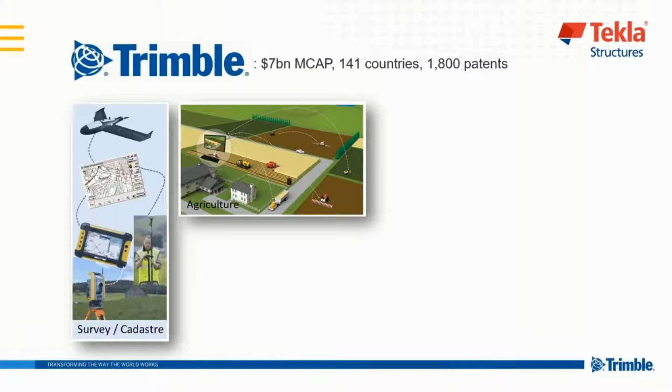To start with, a brief introduction of the company. Tekla Structure is owned by Trimble. Trimble is a $7 billion market cap company with presence in 141 countries with more than 1,800 patent products. We are mainly into surveying equipments, hand-holding equipments, then in agriculture sector. We are also into the transportation and logistics and heavy civil. We are also into the buildings, and Tekla Structure as a package, it's included into the buildings.

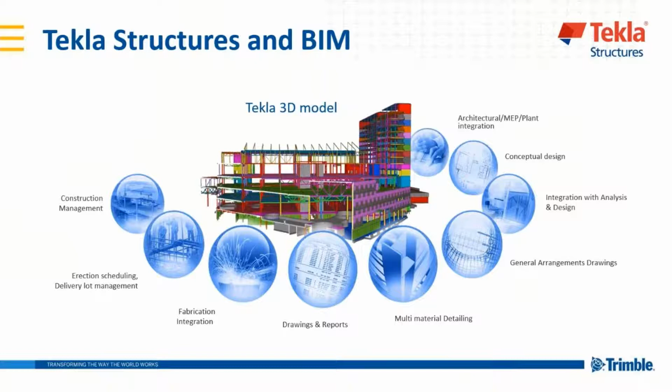Tekla Structures is a model-based software wherein we can import architectural, MEP drawings, conceptual design, then we can create general arrangement drawings, shop drawings, fabrication drawings, drawings and reports for various quantities takeoff can also be done, and construction management tools are available for the same.

Tekla Structures supports 34 major country standards and codes. All the codes such as BS code, Euro code, US code and IS codes are all supported in Tekla Structures.

It's a model-based software, so the change management is very good. For any changes in the model, the reinforcements and drawings are automatically updated, schedules and reports are generated. If there are any changes in surfacing or embeds, the changes are also automatically done.

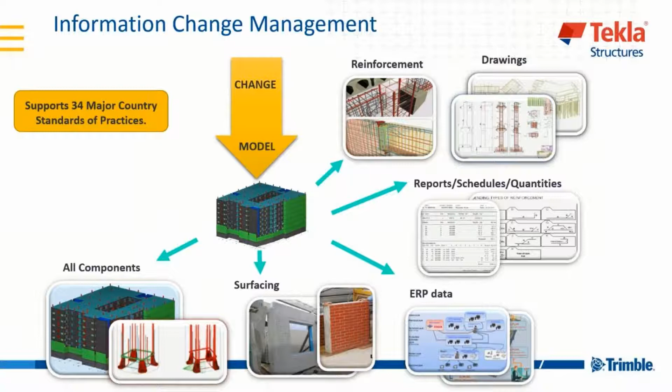It's easy to model and handle complex structures. It is easy for simple structures such as beams, foundations and columns, as well as complicated structures such as bridges, chimneys, silos. We will see this in the next slides. These are some snapshots of typical structures.

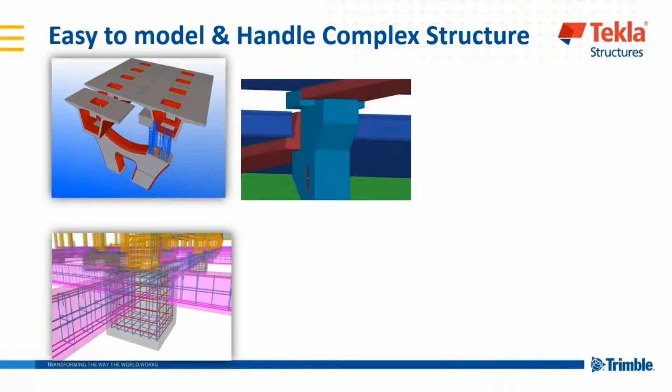Here's something with variable thickness or variable levels, which can be easily modeled in Tekla Structures. This is an octagonal foundation with reinforcement, for which we have some macros.

We can also incorporate MEP drawings and MEP models to check for clashes. If there are any clashes, we can take care of them in the modeling itself so there are no problems at the actual site construction. We can also take up the quantity of formwork from the model.

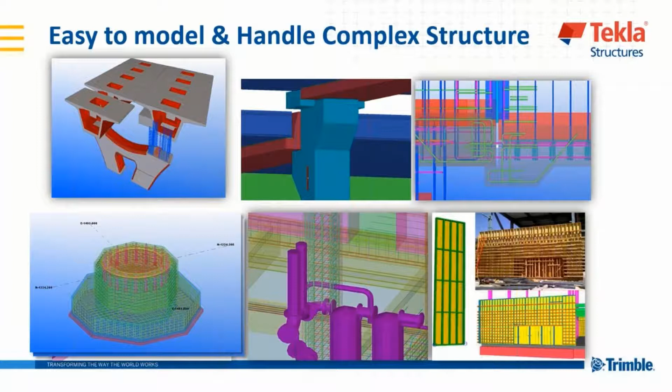Moving on, we have easy modification of object geometry. We have an option called direct modification or direct manipulation, wherein we can just drag to change the geometry of the objects or rebar. It modifies the geometry by dragging handles, edges or surfaces.

This works for concrete beams, columns, panels, slabs and footings, and also for all the steel elements. It can be used to modify cuts or openings present in the structures.

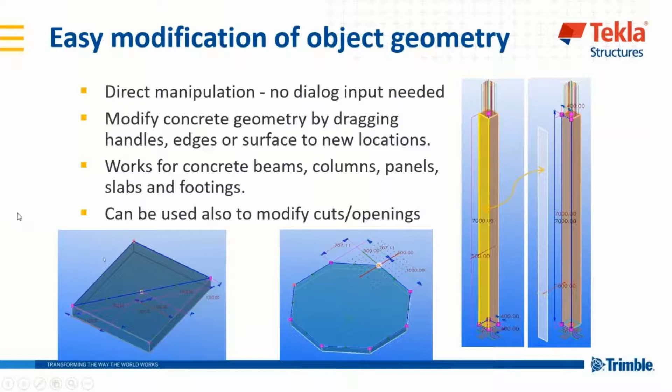Just a small example of how complex geometry can be handled. Here is an example wherein a bridge deck is taken, and a second example which we will be taking is an Intze tank, or an elevated water storage reservoir. We have taken a cross section of it.

We will see how with the help of this AutoCAD file we can create a 3D model. To start with, I've taken a bridge deck profile. Here we have many options to create or define our own profile, such as sketch editor, polygon, plate or DWG file. The sketch editor is basically for parametric profiles, and the rest are for fixed profiles.

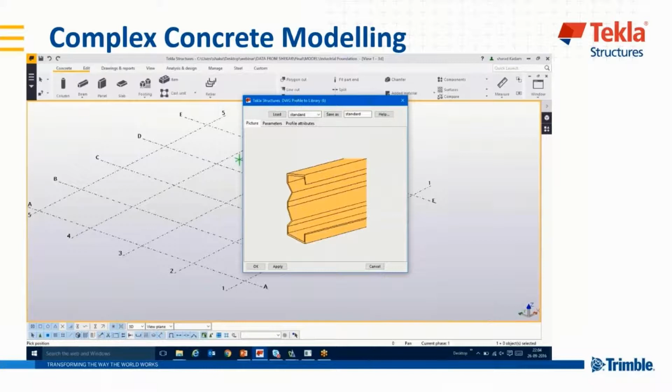So here we are using a DWG file. Here we can specify the name we want to give it. In this case, we have taken the name as bridge, but we can define any name as per our requirement. We select the file, and with just two clicks, the profile is created.

The profile that is created is a native Tekla profile. We can add reinforcement, cut it, or do anything to it the same way we would with a native Tekla profile. These profiles can be taken across the model or shared and taken into a new model as well.

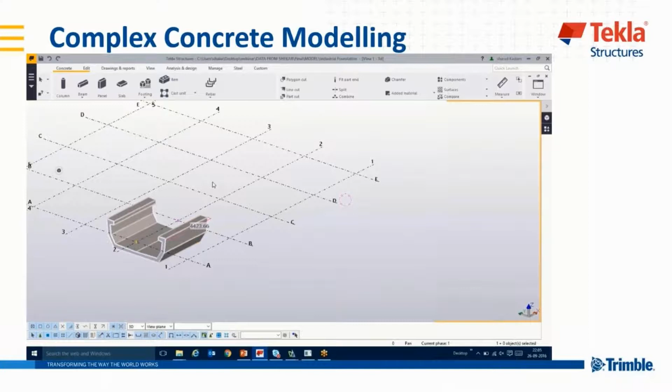Similarly, we will see one more profile, basically a tank profile. Now we will see how it's already created and how we can use it to create a tank profile. This is a cross section we created in a circular manner, and the second half of it. In this way, a circular tank, or an Intze tank, or a water storage structure is created.

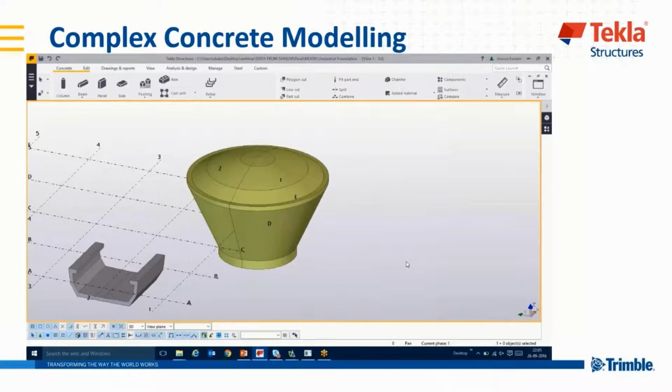We can split it into various pours as per our requirement or as per construction requirements. Just adding some clip planes to it so we can see it clearly.

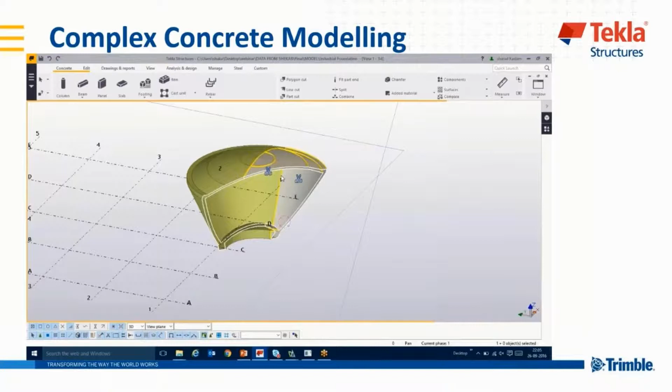It's very easy to create these kinds of profiles, and what we've shown here is not only applicable for a water tank or a bridge profile. This also applies for silos, bunkers, chimneys, or any complicated structure where a profile is required.

Moving on to reinforcement modeling, we have three different approaches. The first approach we prefer is using macros. We have a big library which caters to all requirements, with basic foundations, pad footing, column, beam, slabs, or any other structures. For starter bars, we can use these default macros that are available.

We can create our own custom components if something is missing from the library. Here are a few more components such as piles, octagonal foundation, radial bars, and raft foundations. These are already there with the default installations.

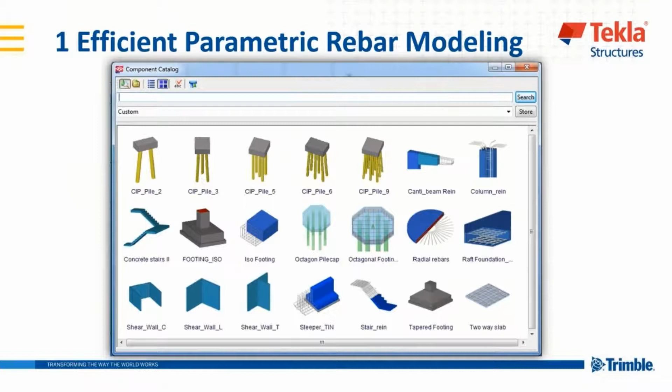Then some more - these are again different kinds of piles, circular foundations or octagonal foundations again, or a pile cap. These are there.

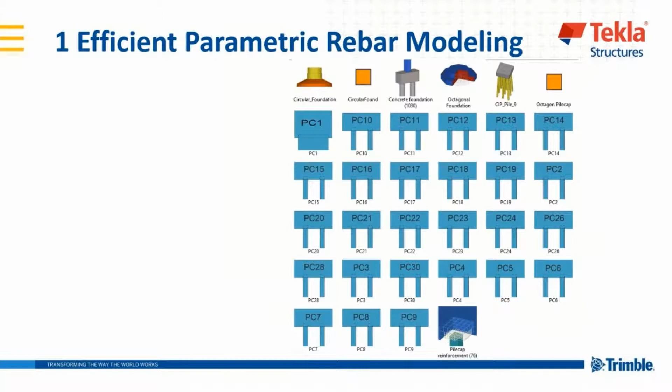The second method for adding rebar is with the rebar shape catalog. This is a dynamic way of modeling reinforcing bars wherein lengths are calculated automatically based on the geometry of the object. We don't have to pick the shape or range of the bar - it is automatically taken care of by the shape catalog. Whatever frequently used bars are there, we can club them together and adjust rebar properties or group properties, spacing, bar diameter, etc.

Herein we can customize this shape catalog. The frequently used shapes such as L bar, straight bar, or U bar can be clubbed together and made as favorites.

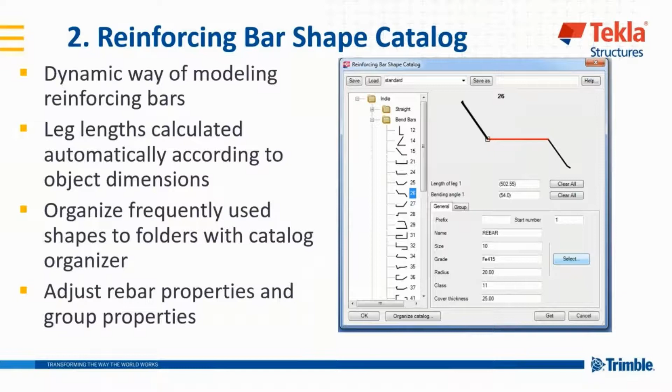The third option for rebar is manual modeling, wherein we can model single rebars as per our requirement. We have various options such as normal rebar, which is just picking the shape and the range. Second option is tapered, wherein the shape varies as per the length of the member, used for tapering members. Third option is tapered ridge or tapered curve, which are self-explanatory. We also have spirals, generally used for circular columns.

We have options for manual and automatic splicing. We can manually splice at whatever locations we want, or use automatic splicing, which generally uses the maximum stock length. We can define this maximum stock length in the program; by default it is 12 meters. It's basically a notepad file, so we can customize it as per our requirement. So if a bar is modeled for say 100 meters, since it's practically not possible to take a 100 meter bar, we can splice it at the 12 meter length or whatever default stock length we have. This stock length can be changed as per our requirement, grade, or company standards. It's a very easy to use tool.

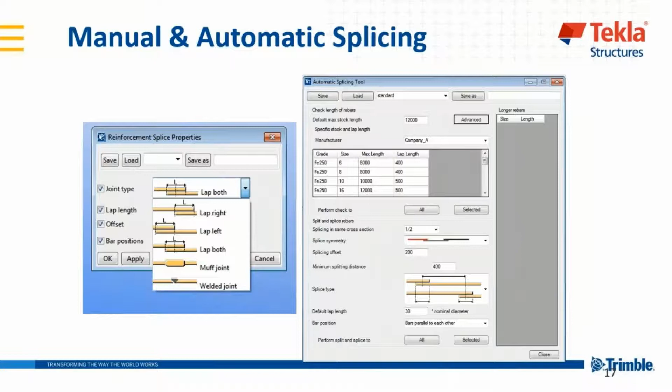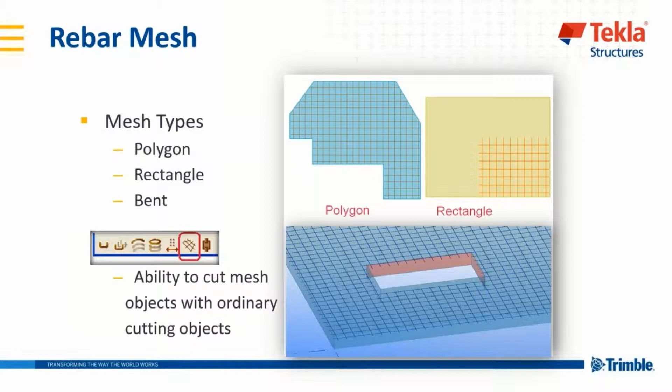We have options for cutting the meshes as per openings, such as shown in this image, wherein if there is an opening we can cut it. There's also an option to ignore the cuts. Suppose some cuts are smaller in length, say 100mm by 100mm, and we want the bars to pass through instead of being cut, that option is also available.

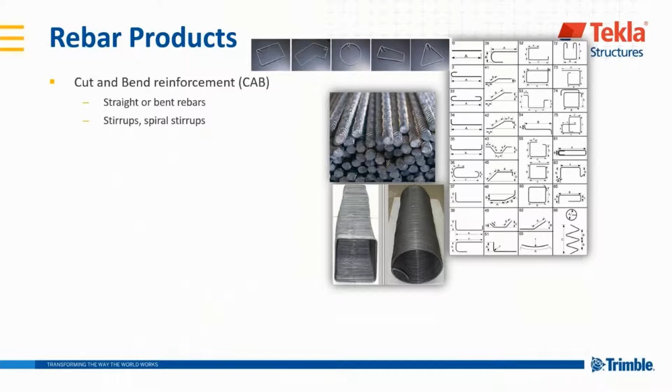Continuing with the rebar products, we have cut and bend reinforcement, which are straight or bent bars. Then we have stirrups or spiral stirrups - normal stirrups and spiral stirrups, mainly used for circular columns. Then we have ties, hoops, and other shapes.

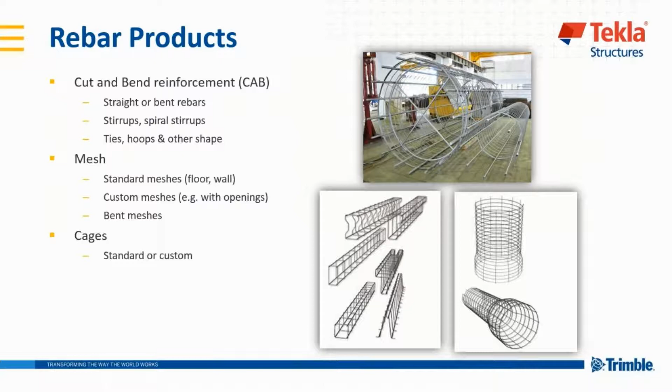We also have meshes, which may be standard or non-standard, custom meshes with or without opening, or bent meshes mainly for trenches or slabs. We can also have cages, maybe standard or non-standard, as per requirement.

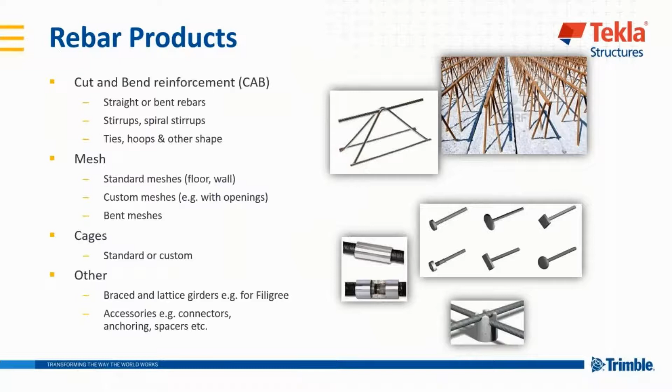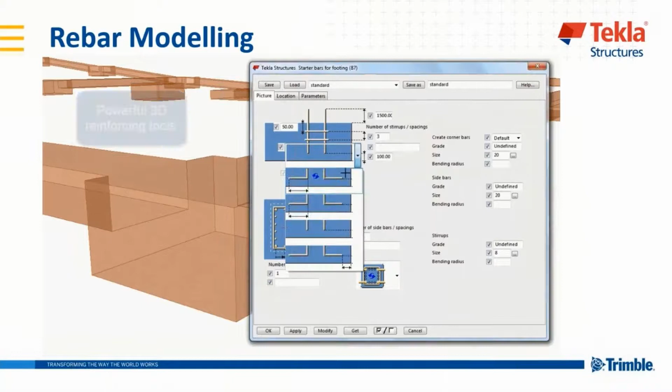Moving on to rebar modeling. Rebar modeling is very easy - for example, here we are adding starter bars to a footing. With just one click the starter bars are added and it is fully customizable. Now we are taking a pad footing macro.

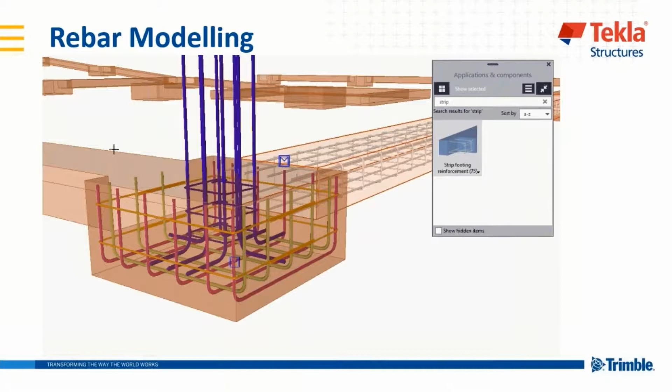We can modify as per our requirement and add the pad footing rebars to it. For strip footing or plinth beam, we can modify the main bars quantities, covers, spacings, etc. This maximizes your productivity.

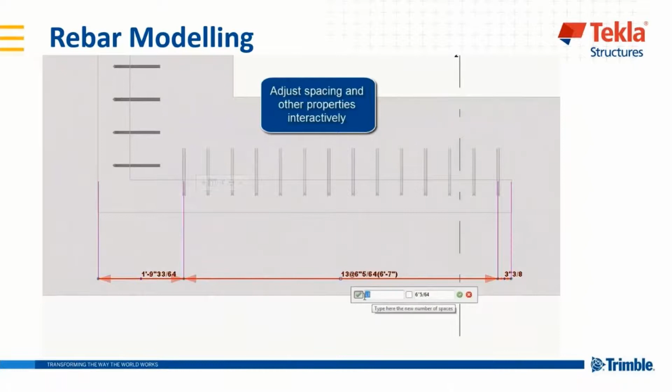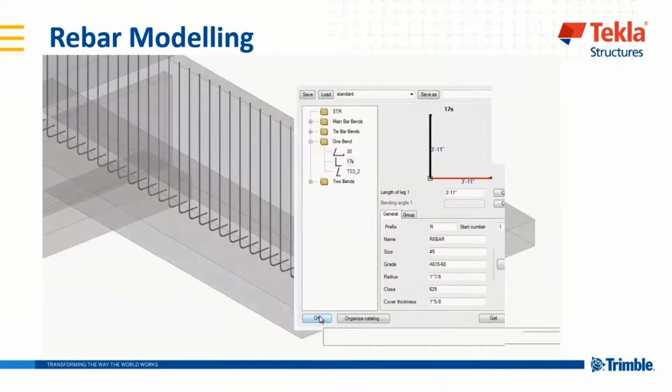The second option we've seen is the shape catalog, wherein we just pick the element and the rebars are added, taking the shape from the object. We can modify the cover, spacing, and how many bars we want - such as here we are putting an 8-inch spacing, so we can modify it as per our requirement. We can shift the bars as needed. Say we want to add an L-shaped bar, so that can be done in whatever direction we want.

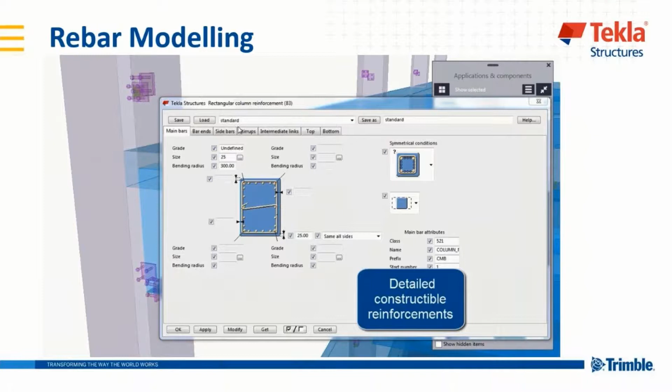Similarly, moving on ahead, this is for a column. We can select the column macro, with or without laps and side bars, define the quantity required, bar dimensions, and everything.

So this reinforcement is added with a lap at the tops. We can also add side bars for slabs, which is basically edge bars. We can select it and with just one click the side bars are added.

Again, longitudinal bars for rebar, for beam. If we want to give some longitudinal rebars to the beam, we can do that. We can provide the hooks at the end as per our requirement, and the length can be changed. It's fully customizable. We can also use the stirrup macro, which has 7 different zones for adding.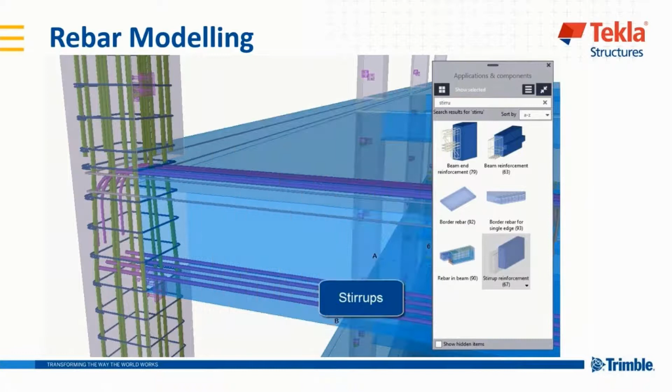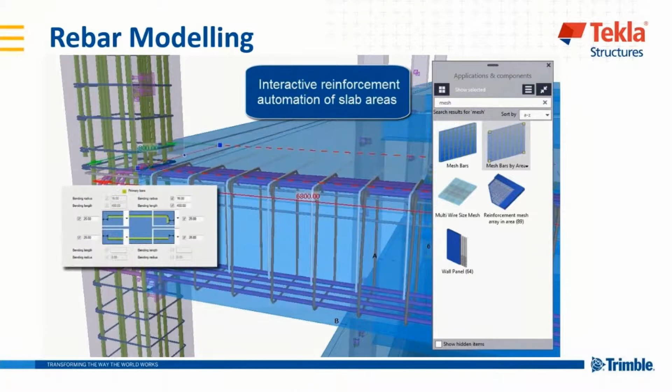Mainly we are using 3 to 5 different zones. We also have options for using 7 different zones. Then we have the mesh reinforcement macro, wherein we can select the macro and with just one click, we can also provide edge bends at the ends as and when required. So with one click the reinforcement is added.

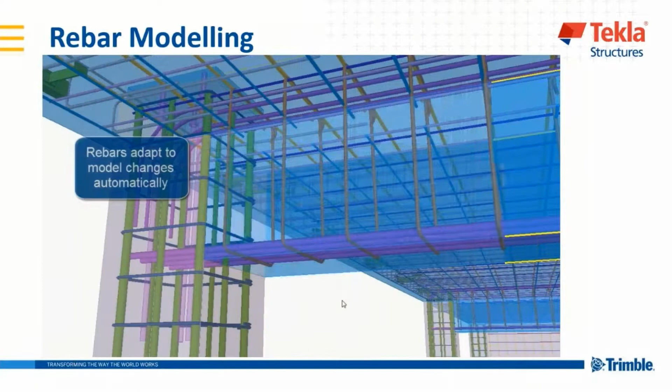So it's very simple, easy to add reinforcement, and this is completely adaptive. Meaning if we are changing the beam sizes or slab sizes, it can be changed. If there are some embeds which are added and it is conflicting with the rebar, we can ensure that it fits. So herein we can see that if it fits in the model, it will definitely fit at site.

We can also get the quantity of rebar that is used. Say for example, here we are getting 6 mm, 8 mm, 10 mm. How much quantity of rebar is used, we can get with just one click. This is through the organizer.

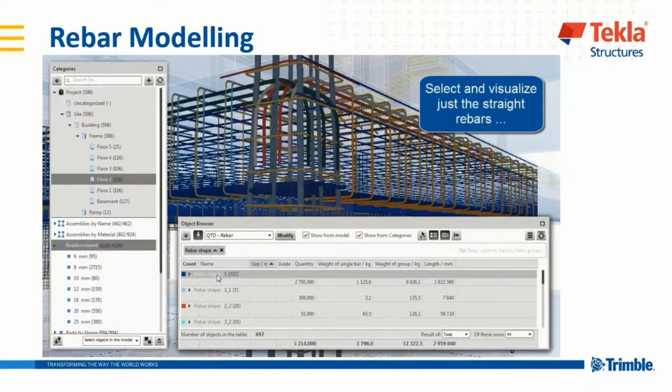Say for example, we want to know for the second floor how much rebar is used. So on the right hand side we can see the rebar quantity. We can group it as per our requirement based on shape, size, diameter, or whatever options we want. We can color it based on the groups. So herein we can see that all these are the straight bars that are selected.

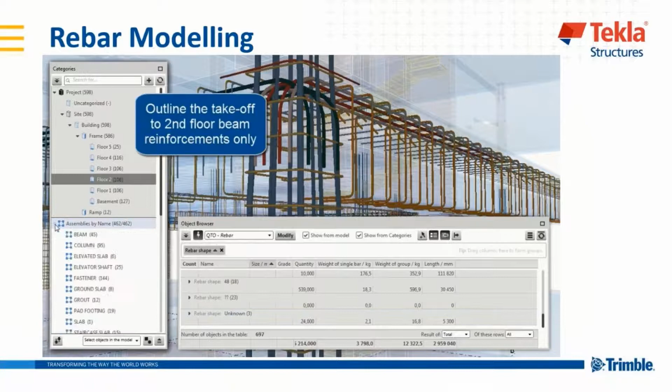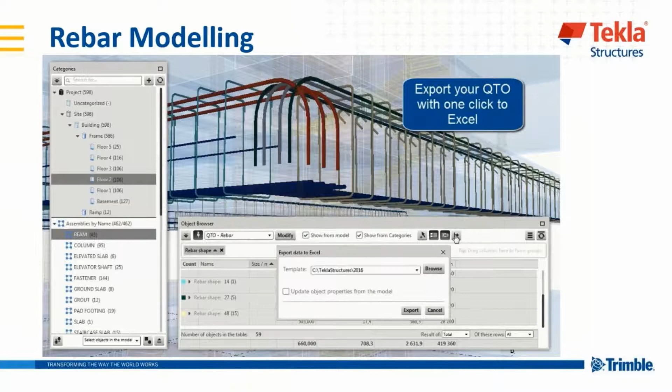And all these things can be exported to Excel as well. So herein we want, say, for second floor beams, we are giving different colors to it, and now we are exporting the quantity to Excel. So with just one click the rebars are exported in Excel format.

And this Excel format is also customizable, wherein you can group and ungroup the bars. So it's very easy to use, easy to handle, and the output that we are getting is very easy to obtain.

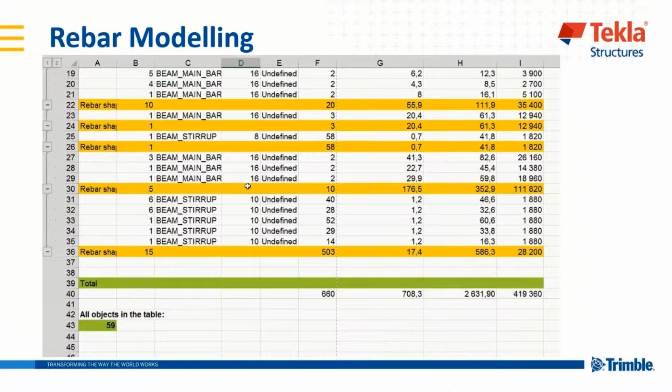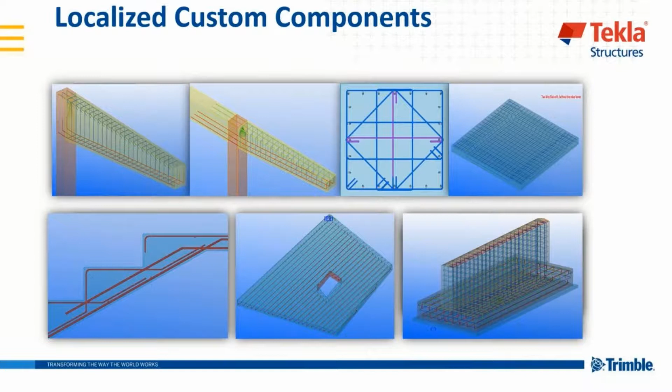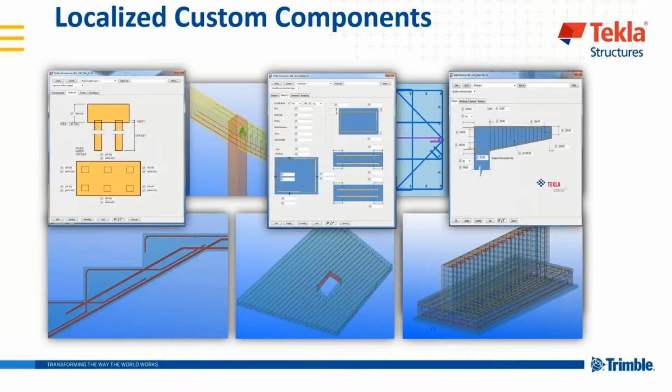So some more modeling tools that are more useful for these kind of industrial structures, such as creating a hollow section. This is useful in case of chimneys, wherein we can also provide the thickness at various stages. If it is tapering at the top, we can define it here itself. So with this kind of tools, it is very useful and handy to create complex geometry.

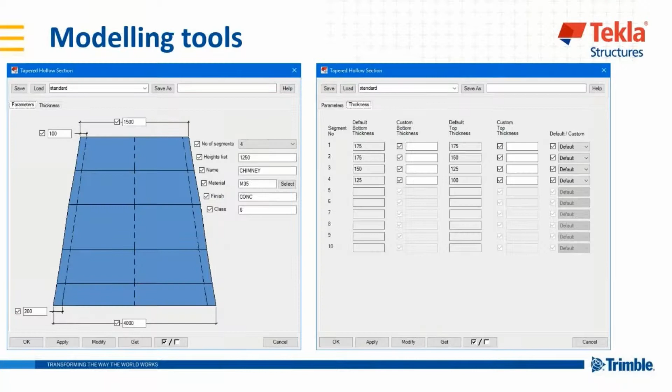So this was basically for tapered hollow sections. And we have a few more tools, mainly for rebar polar array. It is useful in circular tanks or any circular water retaining structures, wherein rebars need to be added as shown in the figure.

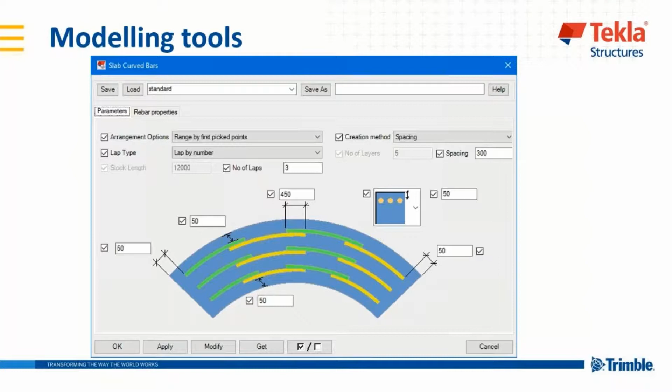Then we also have slab curved bars, which are useful for circular slabs. The rebars are added as in the image. Herein we can also add the stock length or how many laps we want. If we want a fixed amount of laps, we can provide it. If we want to use the stock length, we can provide that as well. There are many options available for this.

So moving on to the next, we also have the hoop bars. Hoop bars are mainly useful for chimneys or in the vertical members, or if there's a circular wall, we can use it in this.

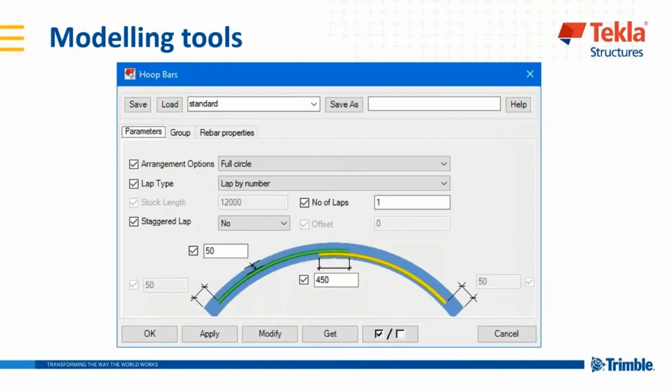Then we also have the circular panel reinforcement, wherein we can use it for vertical reinforcement. Again, we have the options for using stock length, or if we want to give the crank, we can provide the crank as well.

In industrial foundation or industrial structures, embeds play a major role. We have default embeds with Tekla Structures. Here are a few examples of the default embeds that we have. Again, these embeds can be customized as per the requirement.

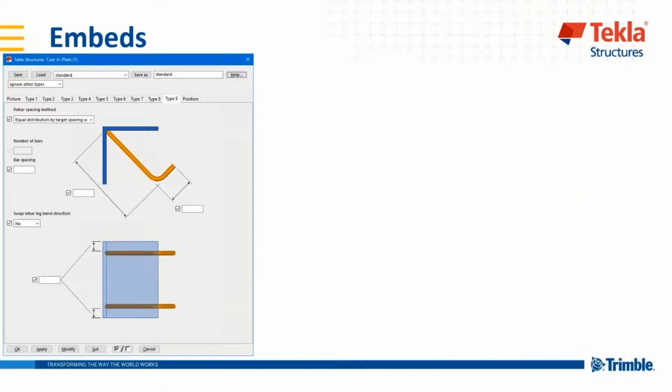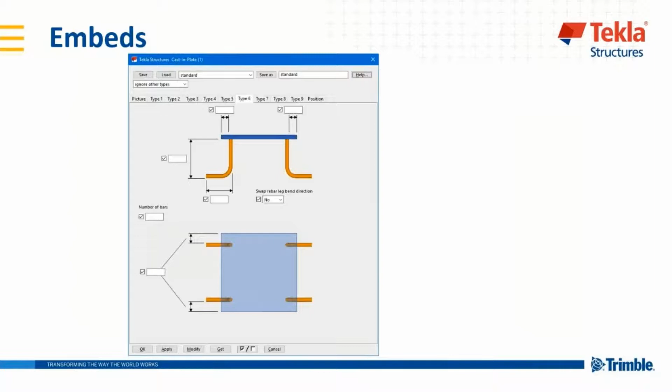We can change the thickness, length, width, or diameter of the bar. All these things are fully customizable. So here are some examples of the embeds available with the default installation. These embeds can be used for industrial foundations or any other industrial structures as well.

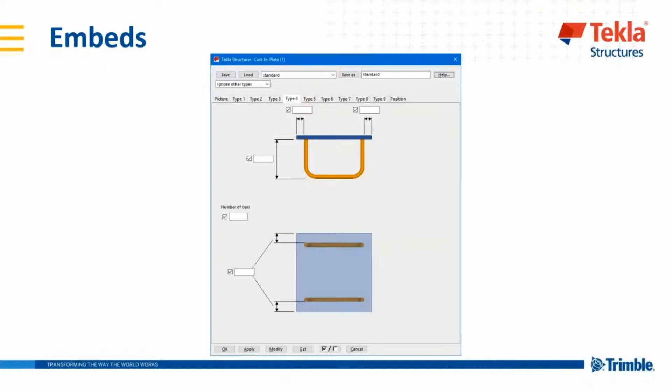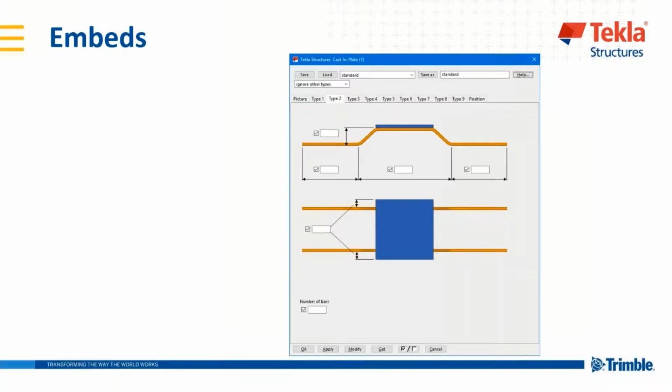We also have a big library in Tekla Warehouse, wherein we can download a few more embeds. So these are the embeds. Again, if you want more bars, we can add that. If you want to change the length of the bar, thickness of the plate, all these things are fully customizable.

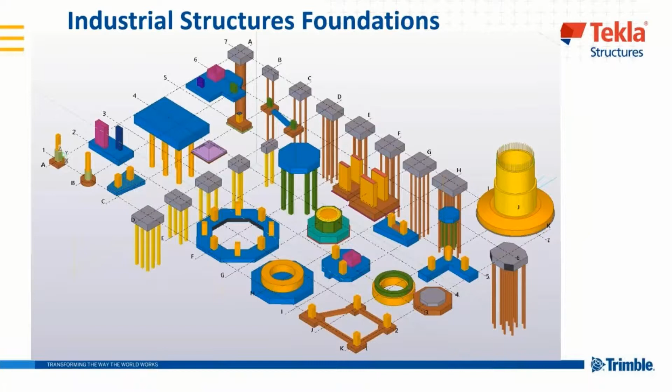Moving on next, this is for modeling of foundations for substructure. We have various kinds of pile structures available. All these pile locations can be moved or shifted as per the requirement. So just a brief snapshot of these industrial structures - we have a circular foundation, octagonal foundations. We will see this in detail in the next slide.

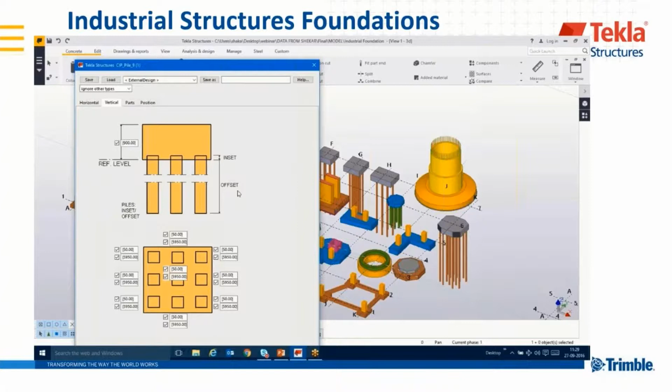Here we can see these are the pile foundations. We can change the dimensions of the piles. We can change the dimensions of the footings, both vertically and horizontally. If we want to change the vertical offset, all these things can be changed. Foundation depth can be varied as per the standards or as per the project requirements.

We also have the options for changing all these dimensions.

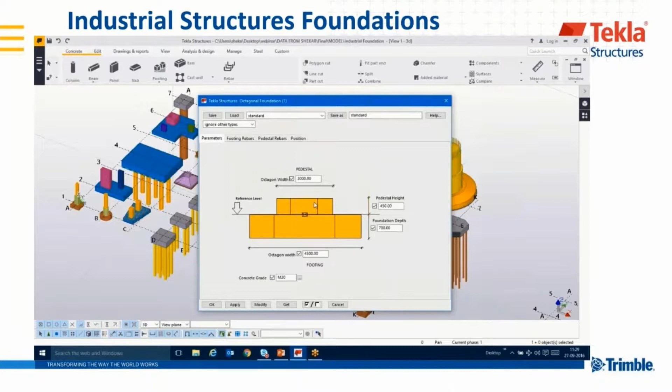Here we have an octagonal footing, octagonal foundation. We can change the pedestal heights, foundation depth, octagon foundation width, pedestal width. All these things are fully customizable. It includes the rebar as well.

So we don't have to first model the concrete and then the rebar - it's there by default. We can change the dimensions, bar diameter, spacing, and everything.

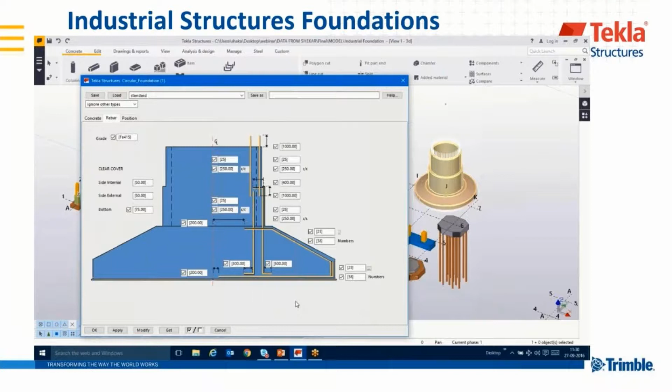We also have circular foundations. It is fully customizable - we can change all these parameters that we can see here. We also have the rebar built in, and changes in spacing and diameter can be done easily.

So this is just a brief introduction of various kinds of foundations available with the default Tekla Structures installation. We also have the normal isolated tapered footing, isolated footing, normal isolated tapered as well.

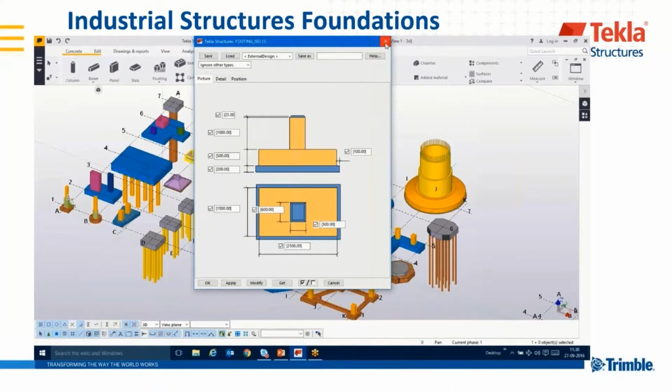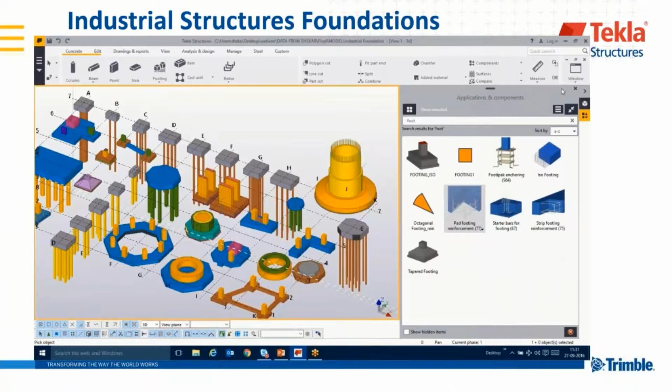We have various options for using normal footings. Here we can see a normal footing, pad footing, wherein we have options for changing primary bar and secondary bar. We have options for giving these bars in three different zones. Lacer bars are also available, as well as starter bars for footing or for column.

Then we have isolated footing. There are various types of pile footings available, so it can be used as per the project requirement or company requirement.

We have the pile reinforcement tool, macro number 76, wherein we can specify primary top bars, primary bottom bars, secondary top bars, secondary bottom bars. We can also specify lacer bars. If we want more bars at the pile location, this tool has the options for providing that as well.

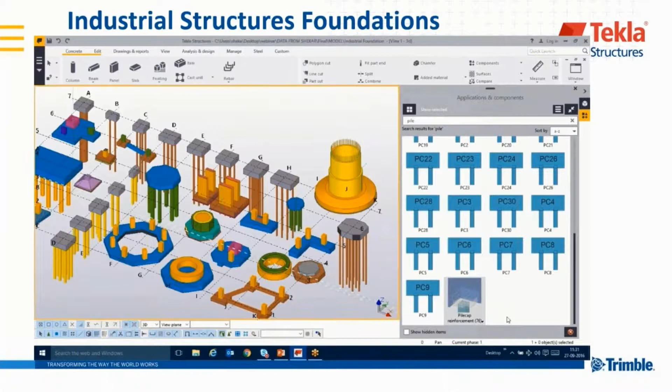So all in all, the industrial structure foundations can be taken care of with Tekla Structures. This is the octagonal footing. With this we can create nearly all types of footings used for industrial projects.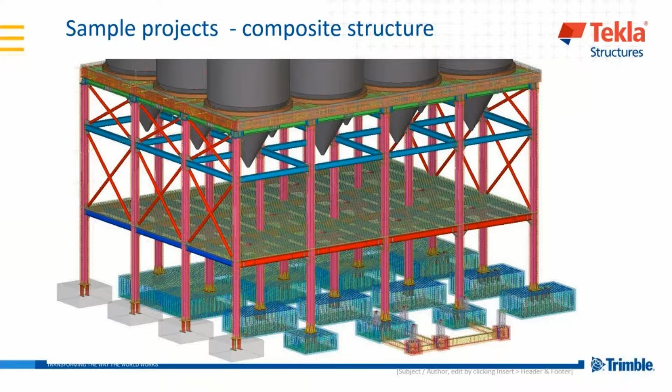Moving on next, here are some sample projects done in Tekla Structures. This is mainly a complex composite structure done by one of our clients. Here we can see that all the foundations and reinforcement have been done in Tekla Structures. Even the top portion has been done in Tekla Structures, and all this reinforcement has been modeled.

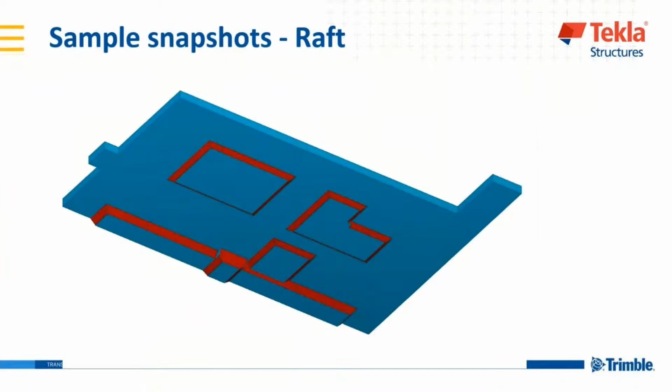Here are some examples of silos, and some snapshots for the raft foundations done in Tekla Structures with rebar.

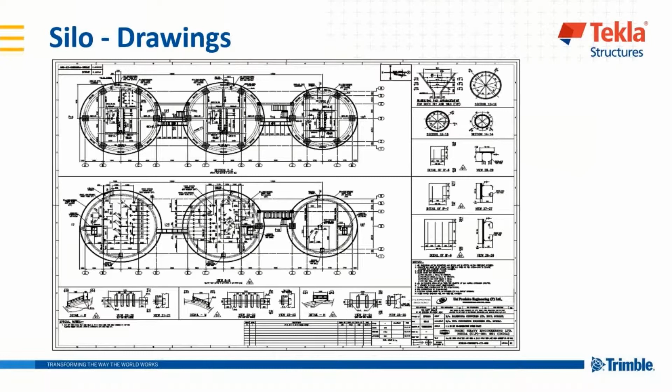Similarly, some more project snapshots. Here is the upper beam and how it is modeled in Tekla Structures. Some drawings for silos - these are the silos drawings created from Tekla Structures. A few more drawings.

Moving on next, we also get instant and up-to-date bar bending schedules. For any changes in the model, the bar bending schedule automatically gets updated - we don't have to create it again. It is instant and up-to-date.

Here are some samples of bar bending schedule which we can obtain on drawing, as well as in Excel format as per our requirement or the company's or project requirements. Here are some snapshots of the same. We also get the BBS as per SP34.

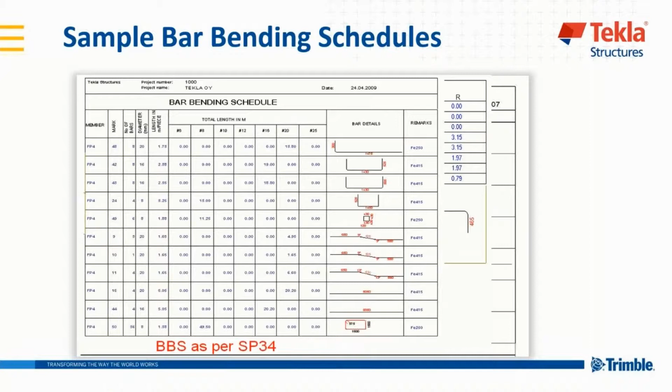We are also using shape code as per IS 2502. If some companies are using as per IS 2502, we have that option as well. A small video of the same: herein we can see that all these rebars are being modeled as per IS 2502. This is the rebar shape manager, where we can see all this rebar is as per the codes that have been defined.

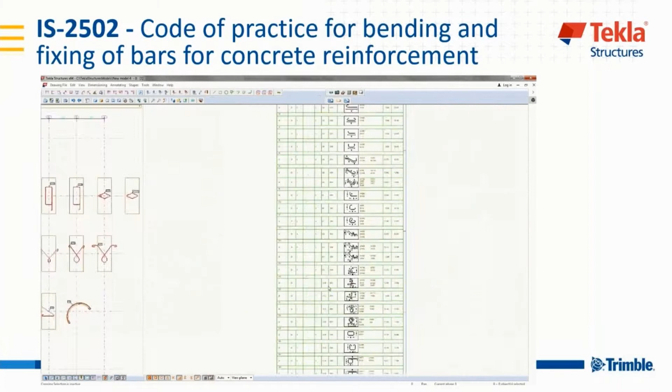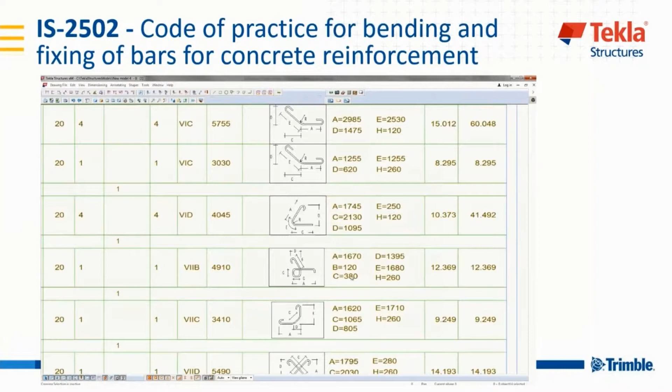So just a small drawing of it and the default output, how it will be obtained in the drawing. We will see this. Herein we can see all these shape codes are the default output, as per IS 2502. All these values A, B, C, D are as per the codes that we are getting. It's very easy to get, and all these templates are available with the default installation.

Moving on next, we have automatic clash detection. In industrial foundation or industrial projects, we use a lot of embeds, and we have a lot of MEP drawings or MEP elements coming up. So it's very essential to know where the clashes are coming up, so that it can be taken care of in the modeling aspects itself, so there should be less or no delay at the actual site. We have a clash check manager wherein we can check or identify clashes easily. This can be removed in the modeling stages itself, and it improves the site progress.

It reduces the delays that happen because of these clashes. It also saves material, and the decision can be taken at the modeling stage itself. So we'll move ahead. Herein we can run the clash check for the complete model, or if we want some part of it to be checked, we can do that as well.

So we can zoom to the objects. Herein we can see that by just clicking on it, we have zoomed to that object, and we can see here that these two objects are clashing with each other. So now we can remove this clash. The decision can be taken in the modeling stages itself.

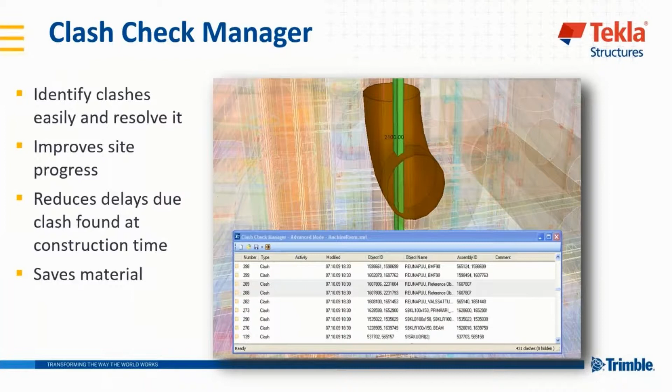Then we can assign it, or we can fix it. There might be some clashes which need to be ignored, and we can ignore these kinds of clashes. There are some clashes which can be taken care of at the site, so we can ignore these as well. Then we can also set the priority, whether it's a high priority clash that will affect the site, so that can also be done here. We can set the priority as low, medium, or high.

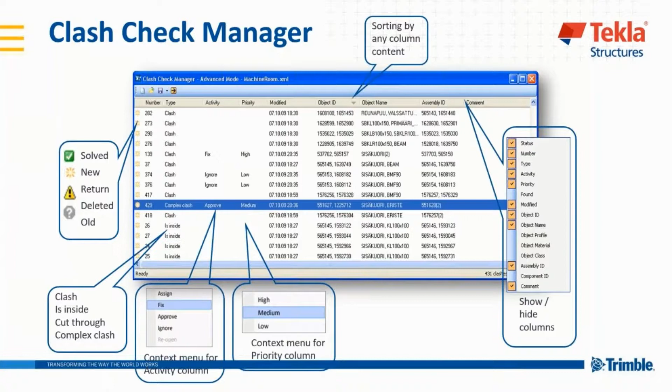This way we can easily remove all these clashes in the modeling aspect as well. We can sort as per our requirement, maybe by column, ID, or object, whatever sorting order we want. We can add various options such as profile, component ID, and assembly ID. All these options can be added or removed from this report, and this report can be exported as well for sharing purposes.

Moving on to the drawing, we have automated drawings wherein these drawings are created. There is no conflict, and the change management is powerful. If there is any change in the model, then the change in the drawing is automatically done with clouds, so that it can be identified where the change has been made. Seen here in this image on the right hand side, we can see that the inserts are placed, and after changing the column sizes, it will automatically change in the drawing here.

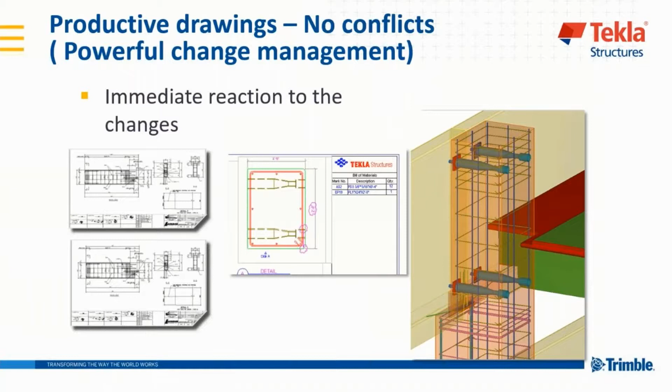So we are changing the sizes and it reflects back in the drawing, so we don't have to do it in the drawing. In a 2D platform, we have to do all these changes and stretch the dimensions manually, but in the 3D platform, or in Tekla Structures, all these changes are taken care of automatically. These are some sample drawings coming from Tekla Structures.

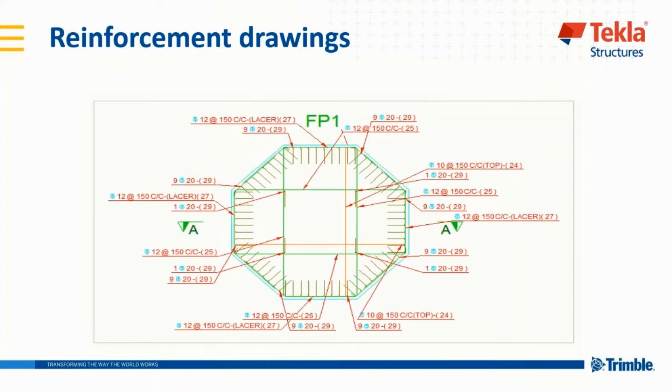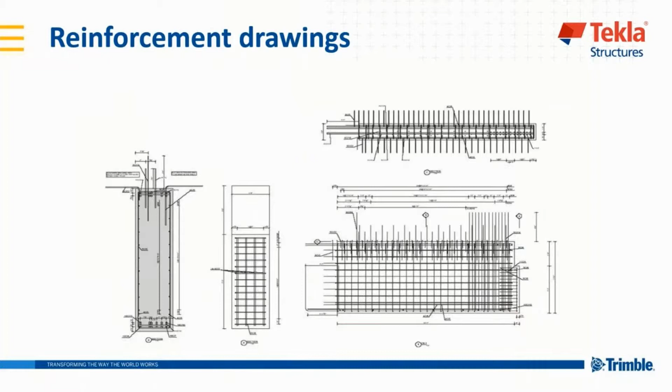Some more snapshots of the same drawing. Here is the column drawing with bar bending schedules, some typical foundations that we are seeing. These are the default options that we are getting, and we can customize the label as per our requirement or company standards. If we want to place a 3D view, or want more views, we can create it as per our requirement. Here are some more drawings for the same, including some circular foundations.

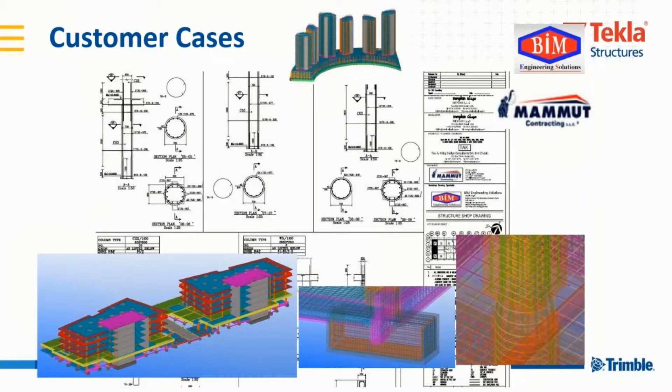Here are some customer cases, drawings, or models received from customers for the actual projects that they have done. Some of the iconic structures here were built using Tekla Structures.

Moving on, next we will see about the benefits that we get with Tekla Structures. It's very easy to model concrete as well as rebar. Change management is very easy and efficient. Tekla Structures can produce the most detailed geometry and better quantity data from the solutions.

Tekla concrete modeling is very easy. Rebar modeling is very simple. We can use macros, manual rebar, or the rebar shape catalog. We can customize our own shapes. Suppose there are some shapes which are not there with the default one, we can create our customized shapes as per our requirement or as per the project requirements.

There's an accurate object-based quantity takeoff, which helps in production logistics. It also helps in fast data transfer from Tekla Structures to production. If we are using CNC machines or bar bending machines, we have options for Unitechnik output, or BVBS format, which can be taken out from Tekla Structures.